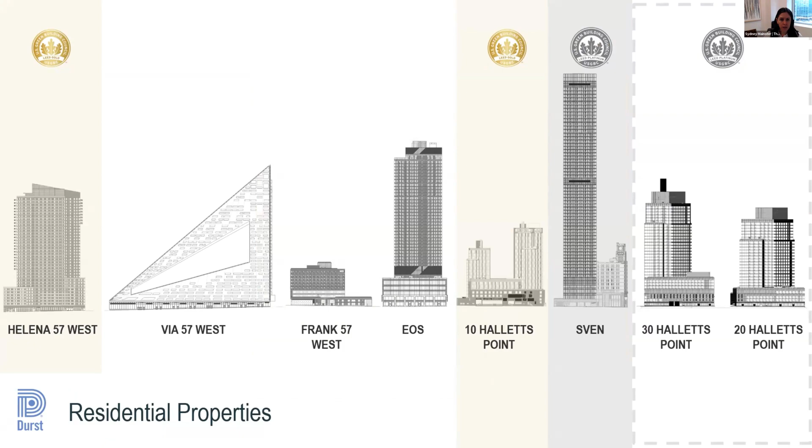In New York, a lot of times I talk about the potential of urban mining, so apologies for some of these slides, but I'm probably preaching to the choir here that urban mining, meaning mining our existing buildings for feedstock for use in a future built environment, has a lot of potential. These are statistics for New York State. There's both job growth and some horrifying statistics that in our state, about 60% of materials annually are discarded from buildings.

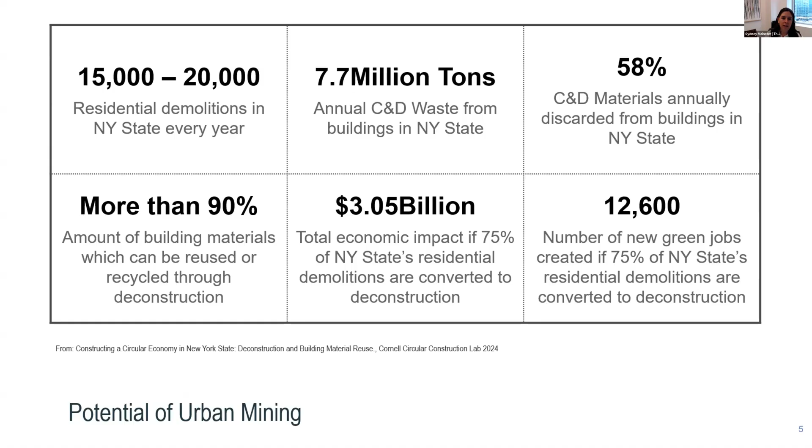I'd also like to set the context, and you guys may talk about this within this group, about embodied carbon. A lot of attention is given to the superstructure and the envelope as the major source of embodied carbon when you're making decisions during design. And I don't disagree that really trying to reduce embodied carbon for those components makes a critical impact on the overall embodied carbon of the building.

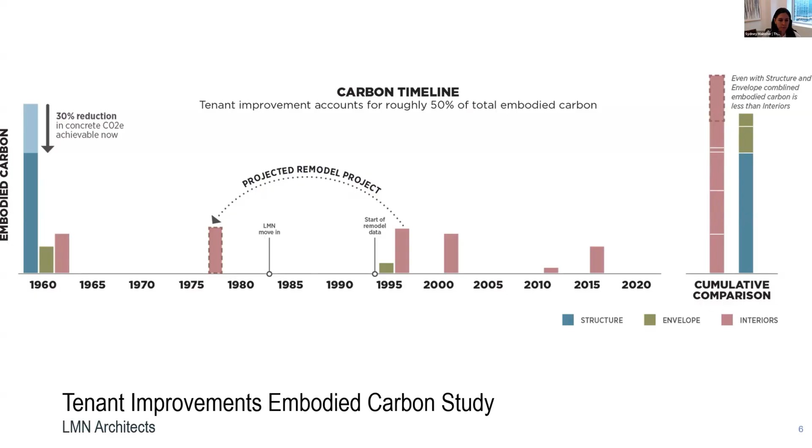But what's interesting about this LMN study is that if you think about embodied carbon over time, the piece that is maybe not perceived as having as big an impact is the interiors. And so over the life of a commercial building, those can start to add up and actually exceed the embodied carbon impacts of the superstructure and those most focused on factors.

So in terms of glass recycling, we for a while on the interiors in our buildings have engaged in reclamation and selective deconstruction for different materials like carpet tile, ceiling tile, drywall for take back and removal, but we never focused on interior glazing. The idea to do this came out of a conversation with CertainTeed. We had piloted closed loop drywall recycling with them on our 2 multifamily towers in Astoria, Queens. And it went really well. And we said, well, what else could we partner on? And they said they were looking at glass.

So for the first time, we as an entity recaptured 22 tons of interior glass from the office fit out you see here. These were our offices at One Bryant Park, which we needed to move out of, and we're now relocated into a different building.

It's interesting to think about interior glass as an opportunity for deconstruction, because if you think about the exterior, we often don't focus on it because the glass might last 50 years, and certainly if you do a reclad, it's a one-time effort and an opportunity to recapture that glass. But on the interiors, the glass only lasts between 8 to 10 years. That's the average lease length in New York City. So the feedstock available here for us is pretty significant.

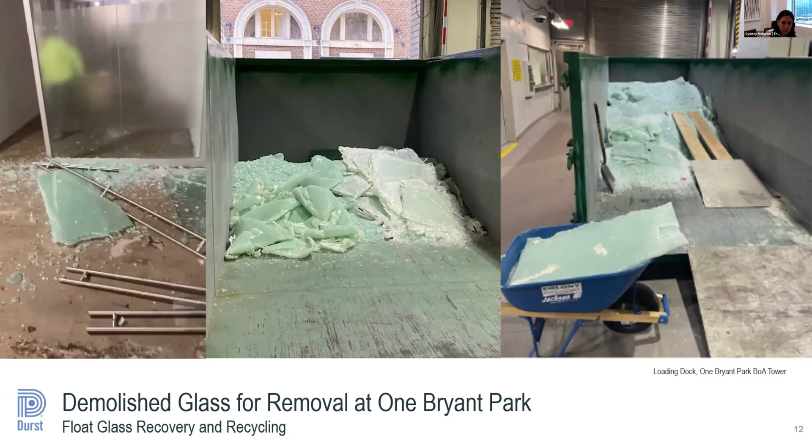Sorry. So why glass, and sort of this hidden material that is right in front of our eyes as an opportunity for reclamation and recycling? There are about 10 million tons of float manufactured in the U.S., and to date, 25% is recycled into cullet, and that's exclusively from the float line from pre-consumer sources.

Our interior reclamation project was the first time a post-consumer source of architectural glass was recaptured, processed, and used for a CertainTeed product in the U.S. So this was a proof of concept for them, which was really exciting for us. I will say it was not the first time we at Durst have done this, and perhaps you guys have done this on projects as well.

We have had success with one project taking exterior single pane glass when we were doing a reglaze, and we actually did turn it into pozzolan as a Portland cement replacement in concrete. And it's not that you can't technologically do it. It's just for us at the time when we did it back in 2017, 2018, we required that the sheet stayed whole.

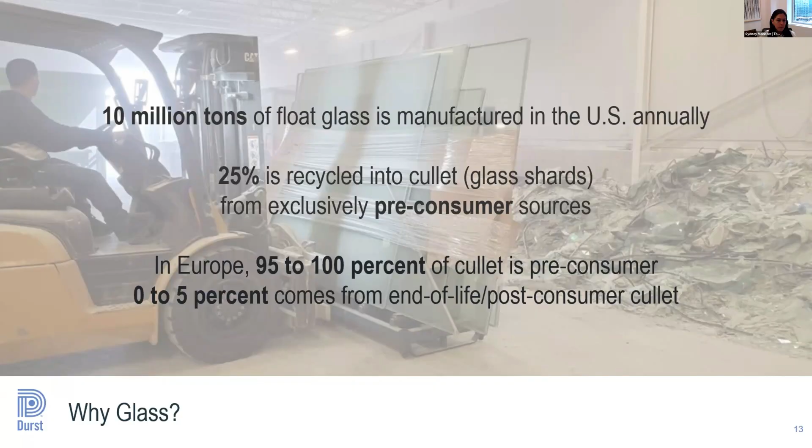And in order to remove a UV film that had been applied, the guys had to use razor blades and physically remove the film before it could get processed, which became actually really dangerous for the guys doing the work. It was labor intensive, and it was, again, not the main material stream for the pozzolan producer. They did it as a proof of concept for us. So there are other projects that have happened since that original pilot.

I think there's some Consigli folks on the call. I was so excited by the fact that I had found this producer out of Minnesota that I called a colleague of mine and asked if there might be another project they could pilot this on. And so we actually did try it on an exterior, and it worked very, very well. So our interior captured about 22 tons, and this pilot here in White Plains recaptured about 40 tons, and they're now moving on to phase 2 of the project.

So after those 2 pilots, we had started to convene and I kind of went on a hearts and minds tour and started to talk to people about this effort. I got connected with more people, and more and more folks decided they were crazy enough to be willing to try this for the first time.

This 222 Broadway was quite interesting because the means and methods of this project were really challenging. There was no loading dock. There was no way to leave a 30-yarder on site.

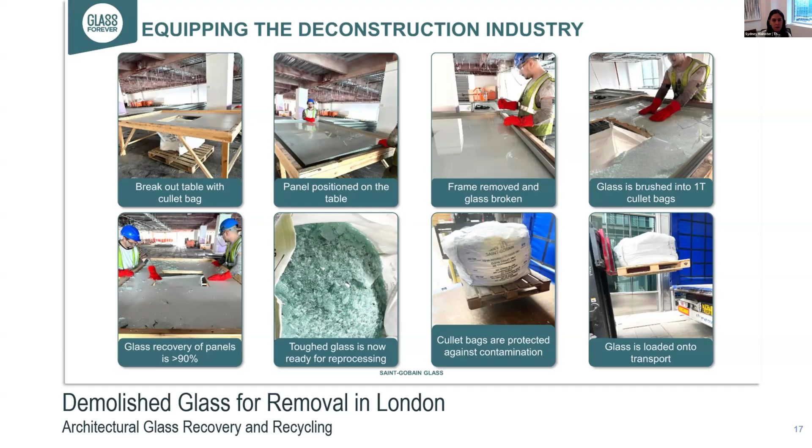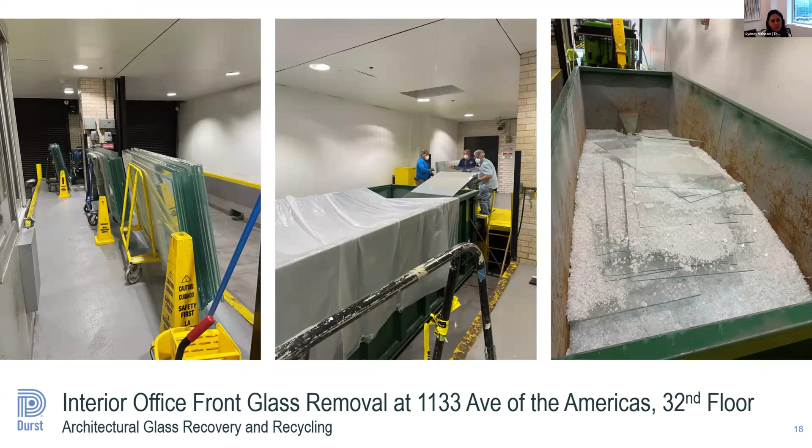We have not yet standardized the process here in New York City, but I think that's okay. Every project we've done so far has different means and methods. Every pilot that I've showed used a slightly different approach to site separation and capture and loading, which I think is better because it means that it doesn't give the contractors an excuse to say they can't do it.

Because I like to say back, well, actually, we've done it like 6 different ways. Pick your method because guess what? We've probably already tried it, or maybe you even have a different one.

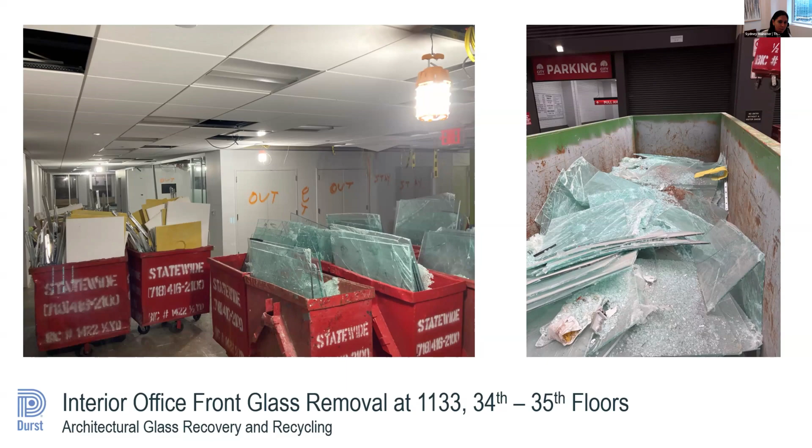So this is currently the ecosystem that we're operating under. The pilot projects we've been doing with this glass recycler have captured that cullet, and for the most part, it's gone back into fiberglass insulation with some other outlets for glass. But I think we're also heading towards an ecosystem where we're not far from this going back into float.

The pre-consumer recapture in the U.S. actually is going back into float. So I think what's interesting is this is sort of testing out the risk model of manufacturers maybe shying away from post-consumer glass as a feedstock. And I think we're not far away from getting that true circular ecosystem established.

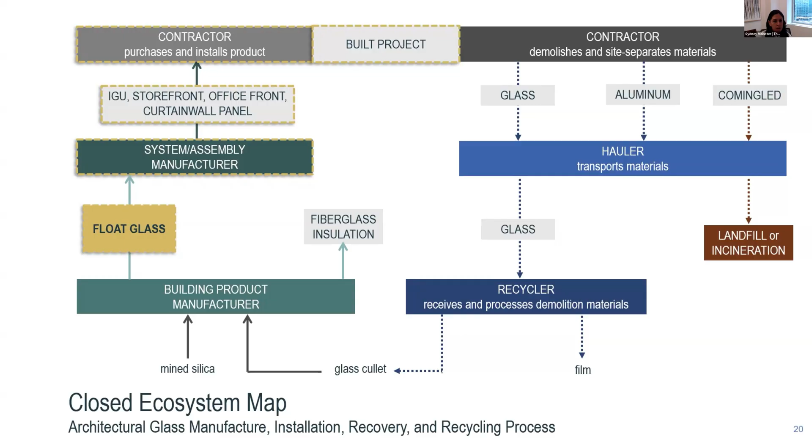I think the other part of this that people maybe forget about is the fact that sand makes up really the majority of the material makeup of glass if you were to do it from mined resources. And sand extraction is significantly detrimental to both the environment, the physical environment in which it's working, and also, frankly, to the people that are involved. It's pretty nefarious and very violent.

The side anecdote I have is that in working with a concrete sub on a building here, I was asking for information about where materials were coming from, and I asked them where the sand came from, and they actually threatened to walk off the job rather than tell me where it was coming from. So I don't think this is something where the U.S. is immune. I think this is a global problem.

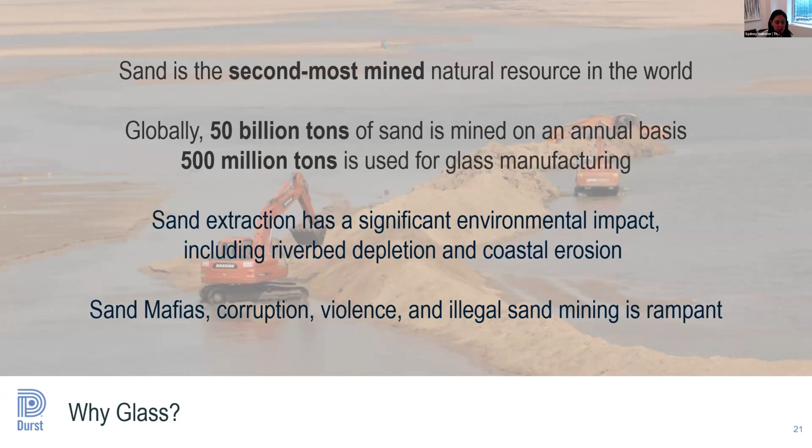So I should say, the benefit of using recycled glass cullet as a replacement for mined silica in glass products like fiberglass is that you can replace the silica as a component of the product.

So for market adoption, we've been talking a lot about how do you do this? How do you really spread this to other projects? And I think we can take some cues from the UK's effort. And I think you really need to equip the people in the field. You remove hurdles. You remove the "I've never done this" contractor markup, where, maybe a lot of you are contractors, you add 10 grand because you've just never done it before.

Identify risks. So there are contamination concerns around glass if you find that it's hot. There's been a discussion about how to still make it a viable product for reclamation and processing for your use. You need to talk about making it easy to contract to do this. We've had a lot of discussions about how to get it into the specs early.

And one of the pieces of advice I give to projects is to make sure you get it into the scope document before you award the demo contractor's work. Because if you do it afterward, it's a change order and they're going to charge unnecessarily for it. You also need to really engage the design community early to get that spec language in there.

And most importantly, on the back end, what I tell the designers that I speak with is that you need to specify products that contain the post-consumer content from recycled architectural glass. Like, identify that you want fiberglass produced with a certain content made from this feedstock.

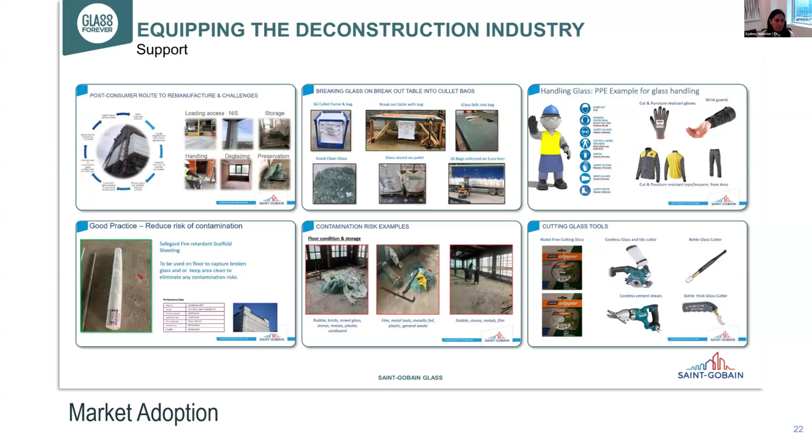So what's been happening since that June 24 pilot effort at One Bryant Park is I've been holding a stakeholder working group every 6 weeks. There are about 80 people that are invited. We usually have about 40 people attend. And it is truly multi-stakeholder, where we have everybody from the supply chain participating. So architects, contractors, processors, investors, city agencies.

We do have some academic attendees, not very many, but we really have everybody who has some skin in the game to try to make this work. And I think what's quite fascinating is they've been very open about sharing lessons learned, especially among the contractor community. I think in this way that has really benefited the effort to spread.

We did those 2 pilots in 2024, and to date in New York City, I think by the end of this year, we'll complete around 20 pilot projects. And I'm not certain of the total yet. I'm trying to get the total tonnage by the December meeting of this group, but I think we're going to exceed 800 tons collected. I think that's pretty exciting.

There's enough demand for reclamation and recycling of architectural glass in New York City, so much so that the processor we've been working with is opening a new Newark facility in order to enable a closer location for this processing to occur.